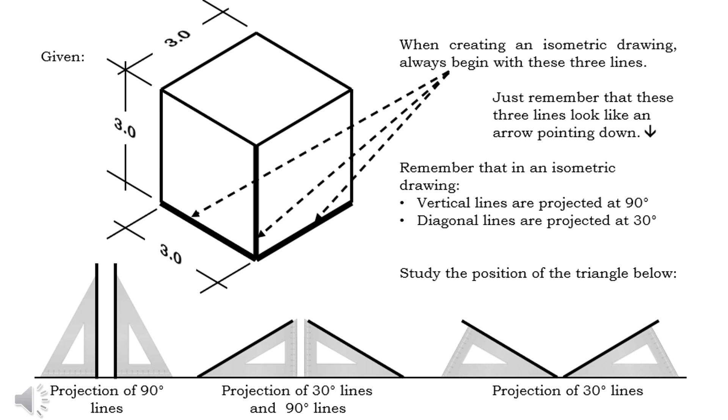For operation sheet 1.1, you are going to create an isometric drawing of a cube with a measurement of 3 centimeters. Make sure that your materials are already ready for use.

For step number 1, create the lines that were mentioned. Use a 30 by 60 degree triangle guided by a T-square. So how are we going to do that? Just follow the steps that I'm going to show you. We have here the T-square to guide you with creating the lines using a 30 by 60 degree triangle.

First, let us create the vertical line. Whenever you are going to create a vertical line or whenever you are using a triangle, just remember the position of the triangle. Always remember this, it's just like that.

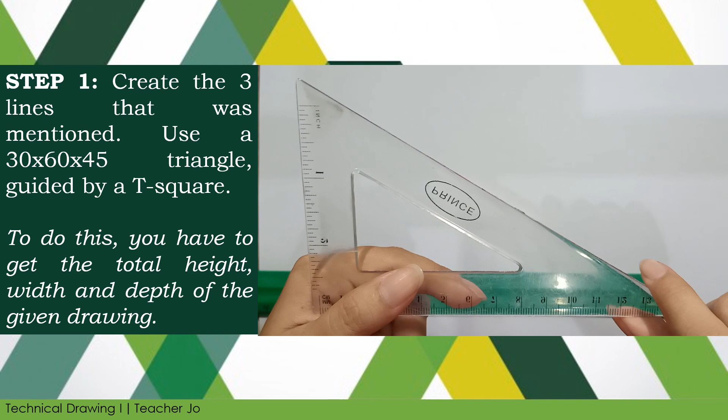We have to create the diagonal lines, and then you're going to flip it on the other side. So you will be projecting the vertical or diagonal lines on the right side from the intersections of these two lines that you have created earlier, from this projection to...

I think the lines are too thin. Can you still see it? Okay, so...

The next is, it is said here that to do this you have to get the total height, width, and depth of the given drawing. So these three lines actually represent the 3 dimensions.

The vertical line here would be the height. The diagonal line on the left will be the width, and the diagonal line on the right side would be the depth. Since we have a cube, or the given object is a cube having a measurement of 3 centimeters...

From these intersections you will measure 3, or you will mark a point with a distance of 3 centimeters. So you may use your ruler or your triangle, since it also has the centimeter measurements on this scale.

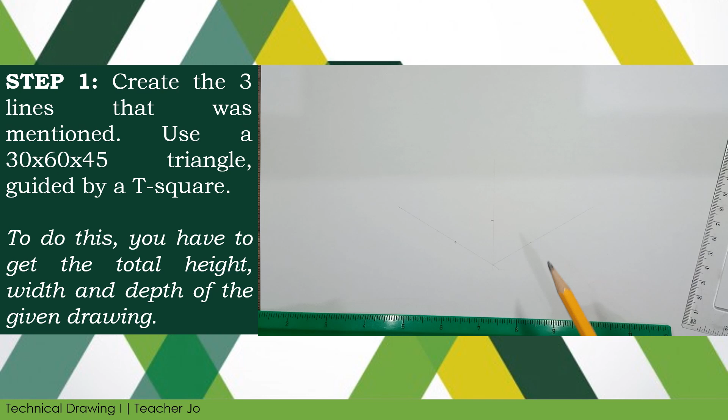For step number 2, project vertical lines from the ends of the created diagonal lines. We have 2 diagonal lines in this drawing that was previously created. The next step that we're going to do is to create a vertical line.

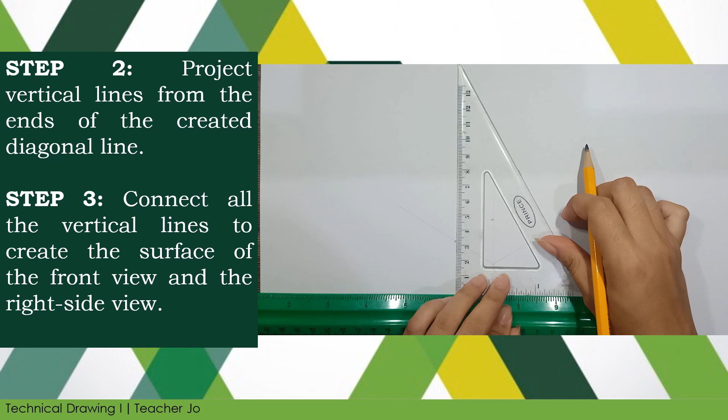Always remember that when creating a vertical line, we will be using 90 degrees, and then project. From this point that you created, just create a vertical line. Take a look at how I use this T-square to guide the triangle in creating lines. Now I have created a vertical line, and then on the other side.

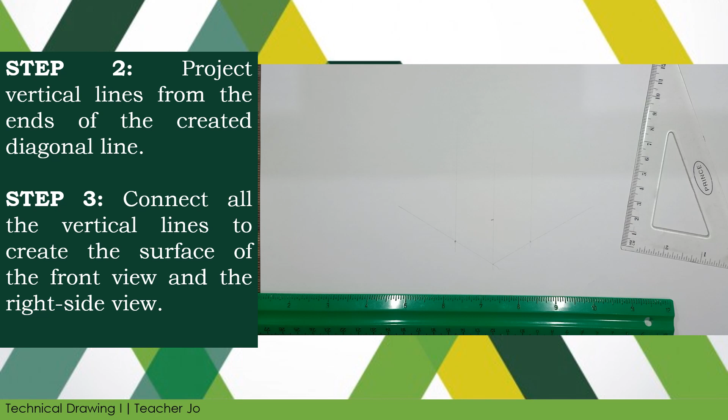Next, for step number 3, connect all vertical lines to create the surfaces of the front view and the right side view. Remember that I marked a point on this vertical axis. From this point, I am going to create a diagonal line going to the left and then to the right, which indicates the width and depth of the object.

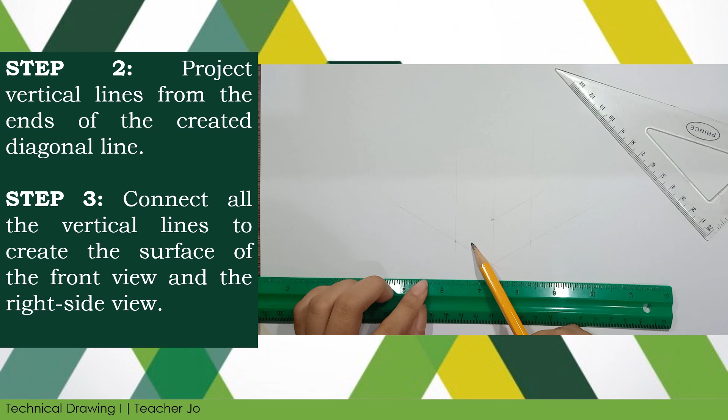Again, with the use of my T-square, I am going to guide my triangle to create these lines. From this point I will create a diagonal line, and then again from this point another diagonal line. So now I have the surface of the front view and the right side view.

Next step: create the surface of the top view by projecting and connecting the remaining lines. Which lines should I connect? These intersections will lead you to create the top view, or the surface of the top view. So I'm just going to use this triangle and project it.

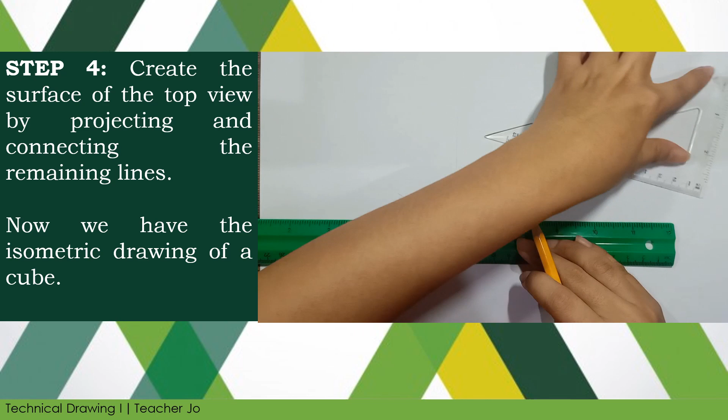And then I'm just going to flip or rotate this triangle and project the lines. So now I can visualize the shape of the cube here.

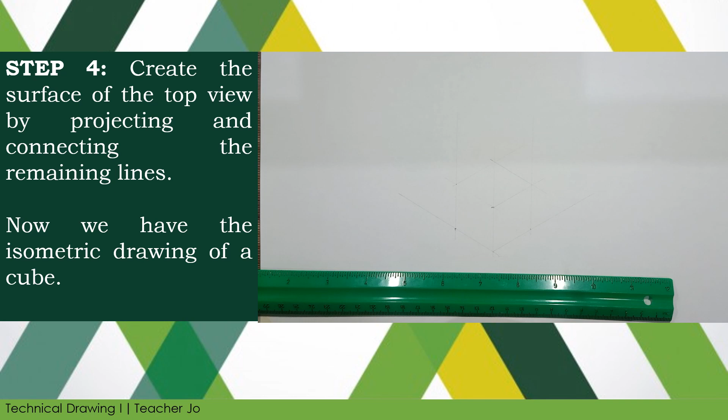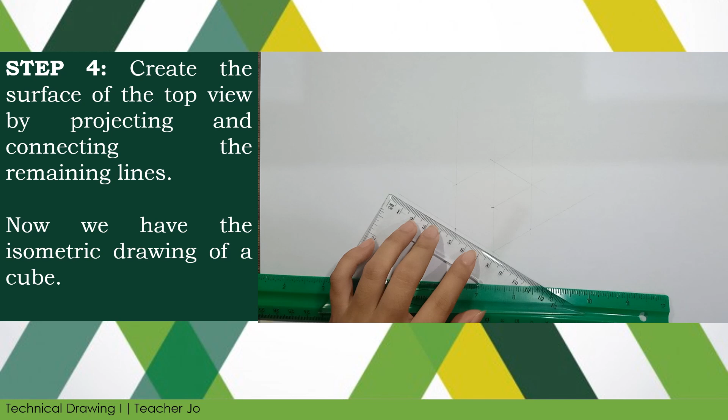So what is important to remember when projecting lines? Take a look at this - these lines are parallel with each other. Can you see it?

Let's get the outline of this object. First, let us darken all the vertical lines. With the use of our ruler, let's darken the vertical lines. Can you see? We have 1, 2, and then 3 vertical lines.

And then the next edges that we are going to darken are the edges on the front view. We have this diagonal line here, and then here. Now we have the front view.

Now let's create the right side view. Can you see that this line and this one are parallel with each other? They're facing the same direction. And then these lines are also parallel with each other, going to the same direction.

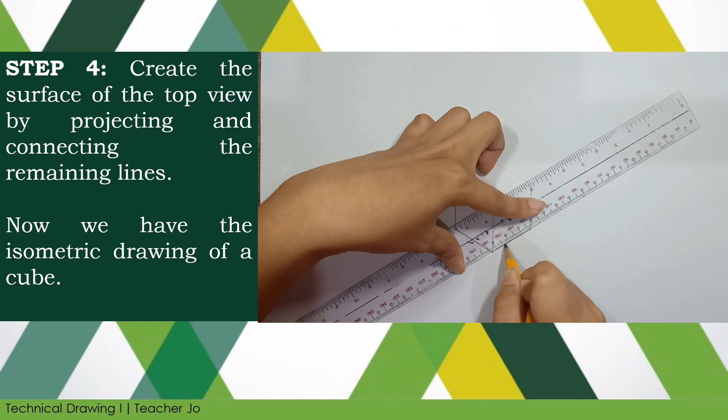So let's create the surface of the right side view. Let's darken this edge, and then this one. Now we have the right side view.

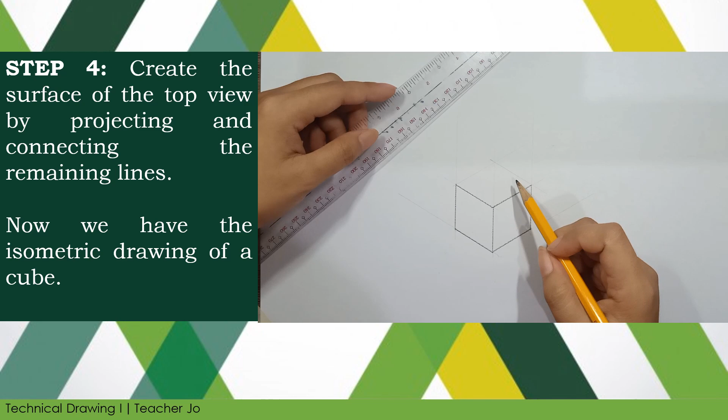The last surface that we have to create, outline or darken is the top view. So this line - can you now see it? These lines are parallel with each other. And then this line is also parallel with these two lines.

Take a look at this - these are all parallel with each other. So now we have an isometric cube.

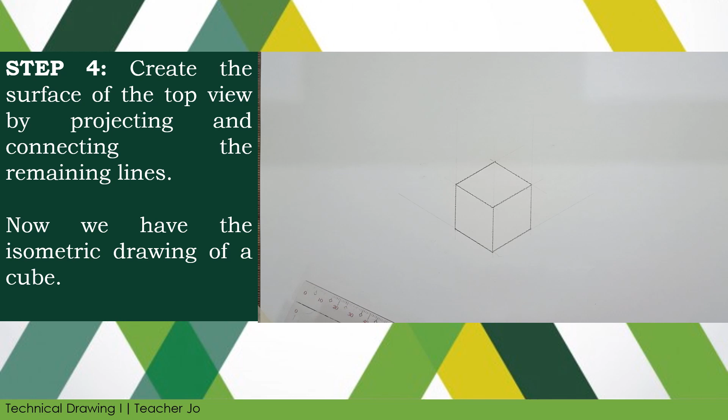For the next activity, operation sheet number 1.2: create the isometric drawing of an object based on a given orthographic view. In this activity, I will show you an orthographic drawing of the isometric or 3D object that we are going to create.

Now take a look at the given orthographic drawing here. We have the top view, front view, and right side view, where each view is indicated with dimensions.

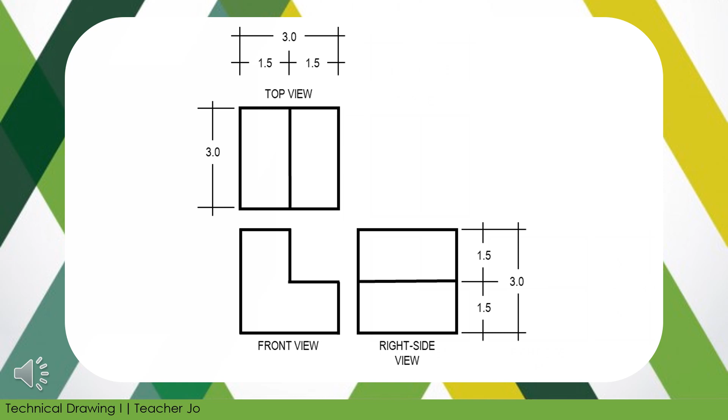For step number 1, you have to create the 3 lines that were mentioned earlier. Use a 30 by 60 degree triangle guided by a T-square. To do this, you have to get the total height, width, and depth of the given drawing.

In this orthographic drawing that is projected here, we have the dimensions indicated on each view. So we have to find the height, depth, and width of the object. The dimension encircled on the right side view would be the height, the dimension circled on the left side of the top view would be the depth, and the width would be 3 cm, which only means that the base form of the object we are going to create is a cube. It is only the base form, not the actual shape of the object.

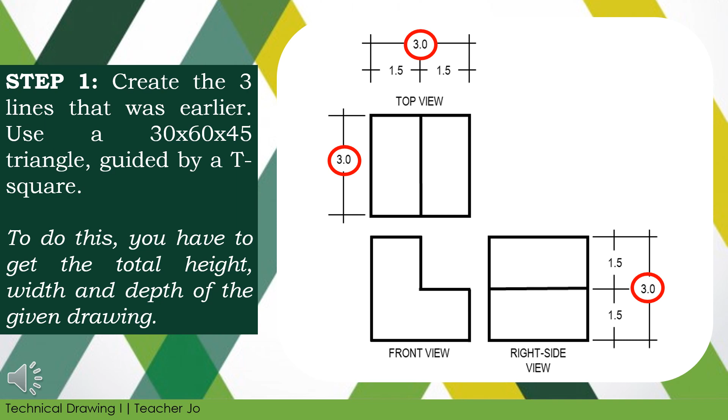Okay, so now let's try creating the base form of this given object. First, we have to create a vertical line. Just remember the steps and don't be confused.

And then we have to create the diagonal lines. It's just the same steps. Okay, so we have to intersect this - these 3 lines should be intersecting with each other.

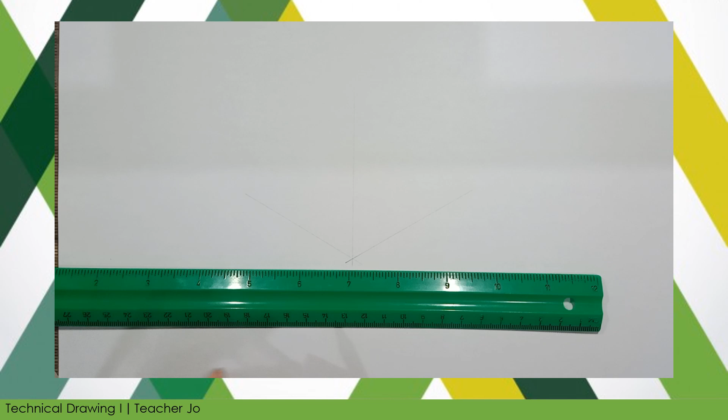From the instruction, we have to get the total height, depth, and width of the object. So we have 3, 3, 3, which means the base form of this object is a cube.

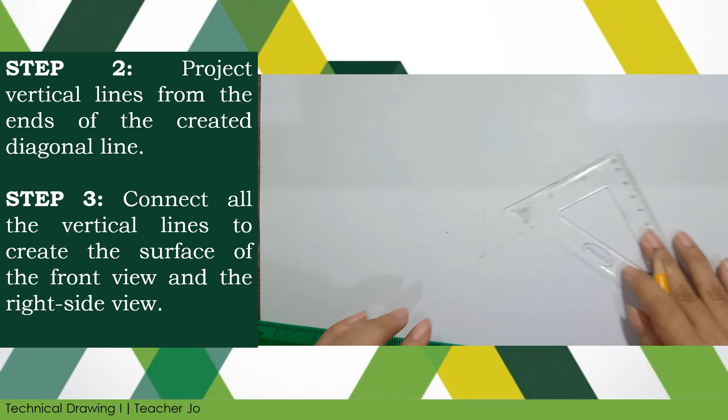So mark a distance of 3, 3, and then again 3 on this side. After that, we have to project a vertical line again - it's just the same steps.

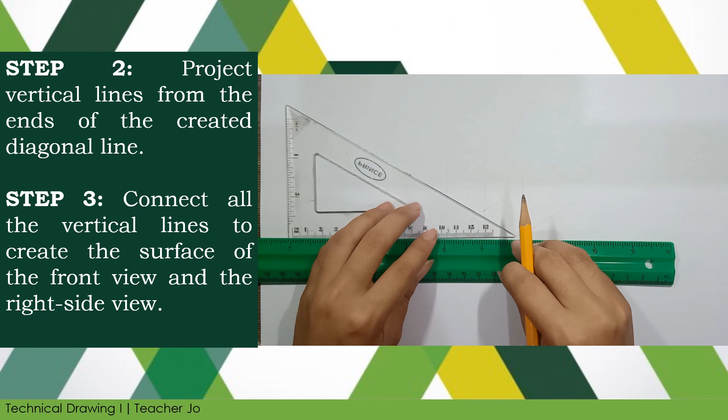So after projecting the vertical lines, we have to create the diagonal lines. From this point, and then flip the triangle to the other side. And then create the top view - from these intersections and these intersections, we will be creating diagonal lines.

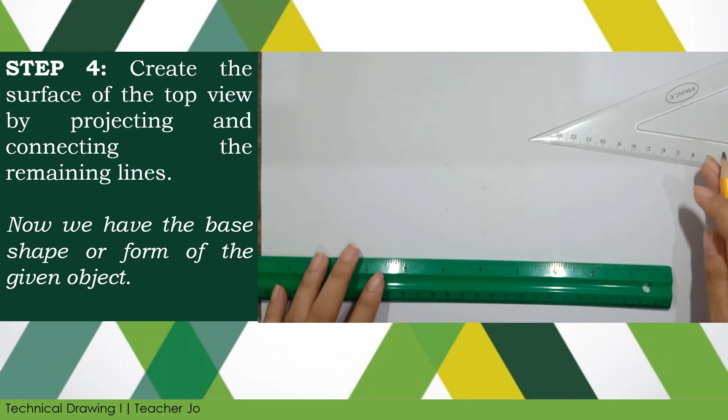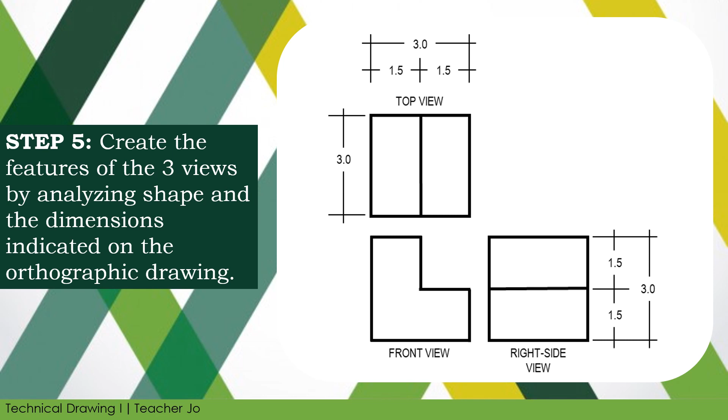Okay, so now we have created the base form or shape of the given object. So for the next step, we create the features of the three views by analyzing the shape and the dimensions indicated on the orthographic drawing.

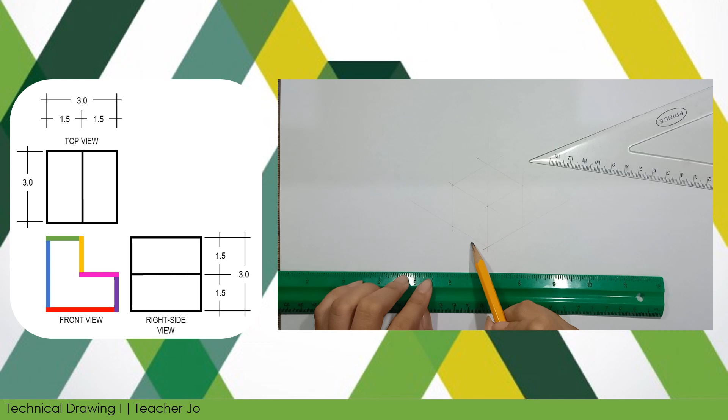Let us first create the front view. I have color-coded each edge or line in the front view because we are going to create it one by one. Let us first identify the red line on the drawing. So the red line would be this one. Since it is already made or created, we can now darken it or outline this one.

Okay, next we have to identify the blue line or blue edge. So we have to create this vertical line. Now we are done creating the red and the blue lines on the given orthographic drawing.

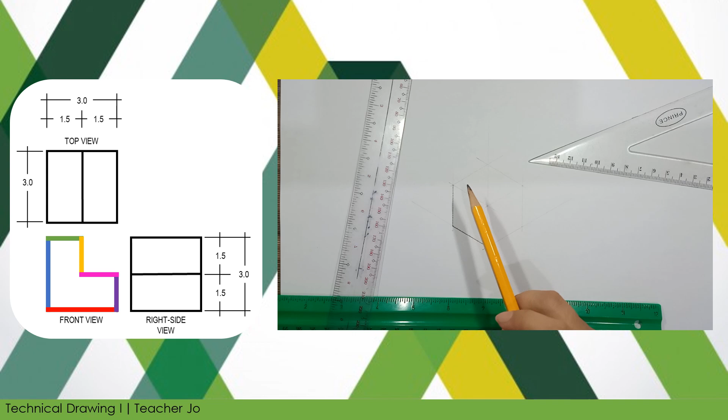The next one is we have to create the green line, which is above the blue line. So this line will be from here. Now let us find the dimension of the green line. How are we going to find it? It's just a matter of analyzing and observing.

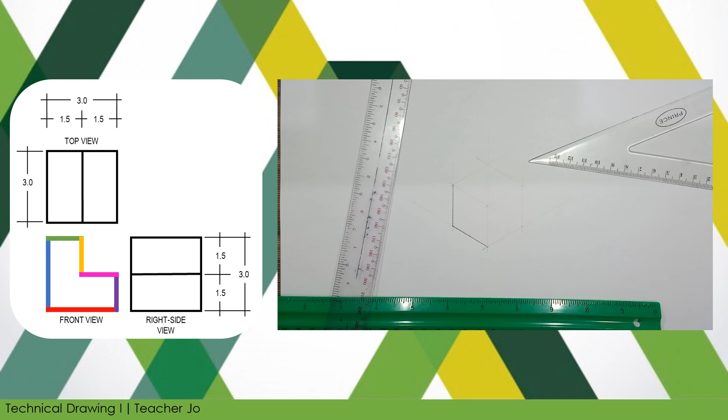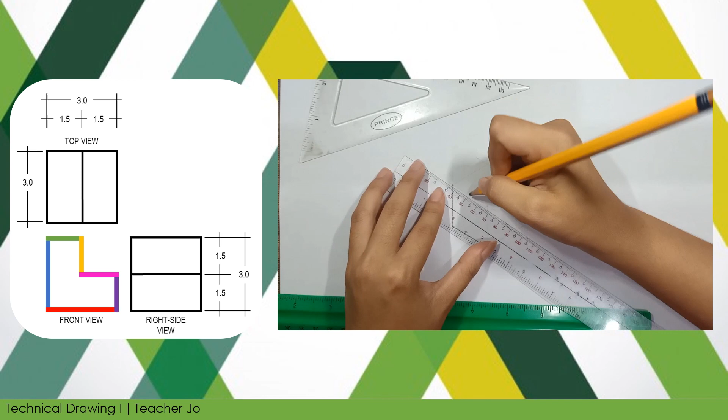If you observe, the green line is the same as the line on the top view, which measures 1.5 centimeters, meaning it's half of the total dimension or total width. So we have to measure 1.5. We already marked 1.5 here. Let's darken it since we are creating the edges one by one.

Okay, so the next is the yellow line. How are we going to create or find the dimension of the yellow line? Just look for the line that is parallel with the yellow line from the right side view. So which line is parallel with the yellow line on the front view?

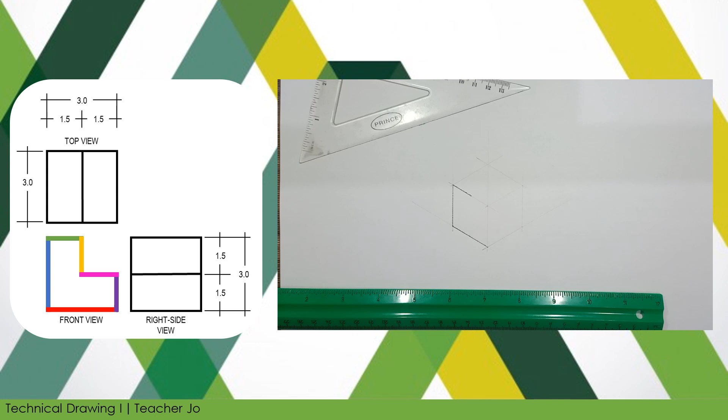So we have this line measuring 1.5 centimeters, meaning it is also half of the total height. So we have this height, this is the total height. We have to mark 1.5. Okay, so 1.5.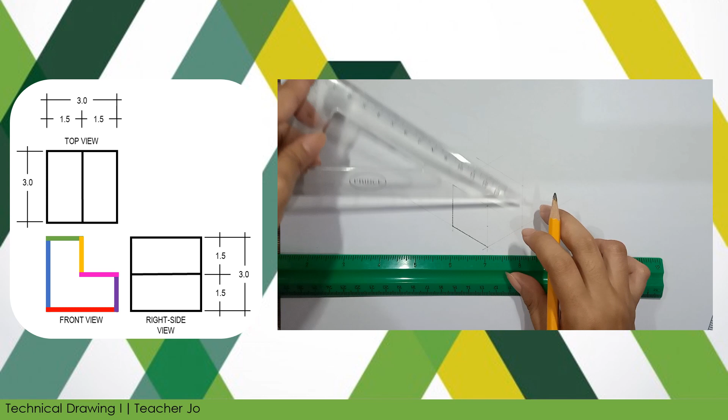So if we're done marking it 1.5, let us project a diagonal line. Can you see it? I have projected a diagonal line, and to get the yellow line on the front view, you just have to project it downward, 90 degrees, until it touches this line or intersects with this line.

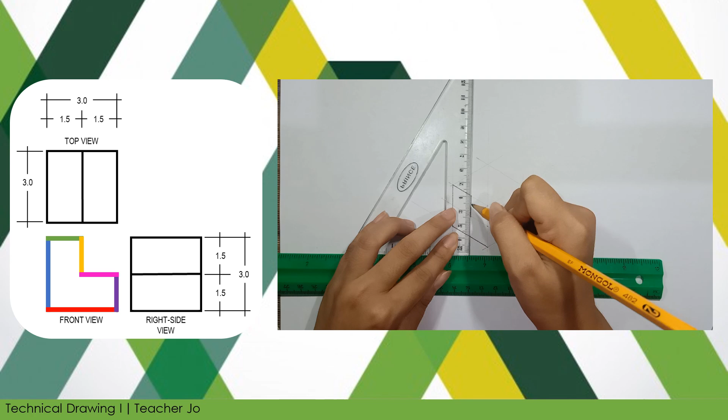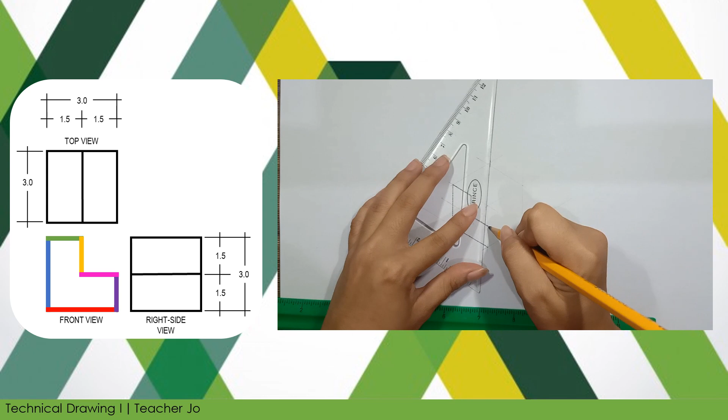Okay, so now we have the yellow line, and next we have the pink line or pink edge. So this will be the pink edge. Let's darken it. And then last is the violet line. So this will be the violet line. So this is how your front view will look like.

So to create the remaining views, you will just have to project the lines from the front view. How are you going to do that? Let us first do the top view.

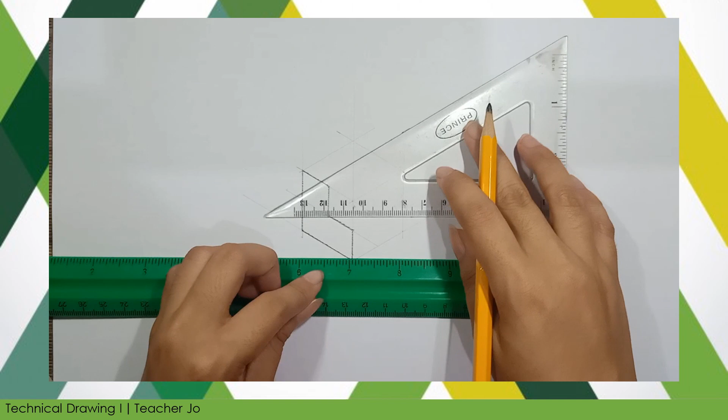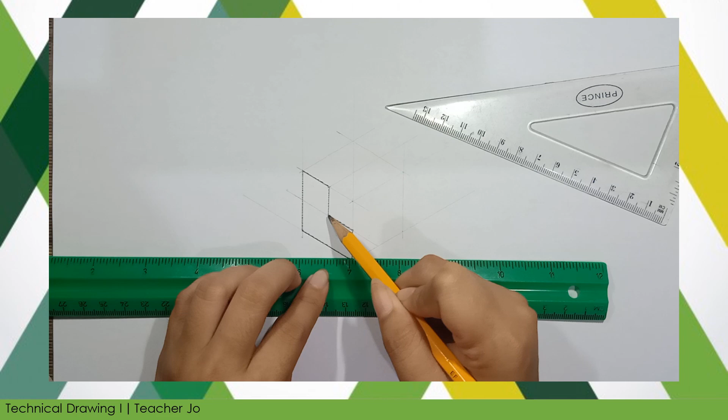Okay, so you can see here that the line is already projected from this point. And then now I'm going to project a line from this point. And then another point here, I'm still going to project it. And then from this point, I'm going to project a diagonal line.

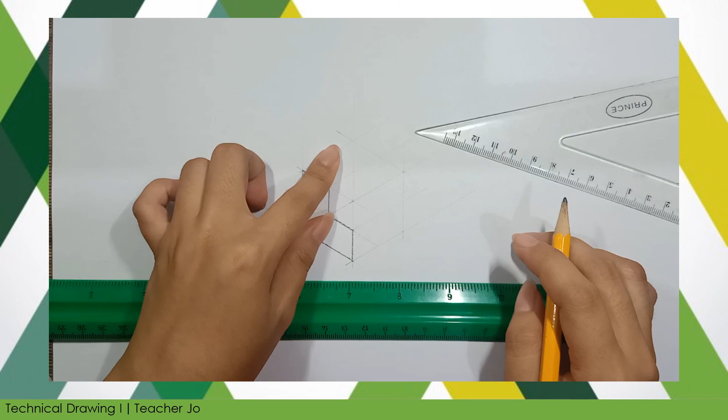You know, doing an isometric drawing is easy, just don't be confused. Okay, so now I have created the top view.

Okay, so and then let us create the right side view. So how are we going to create the right side view or the remaining edges? We can see here the intersections of the lines that I have projected. So this line or this intersection, I just have to project it downwards until it touches this line.

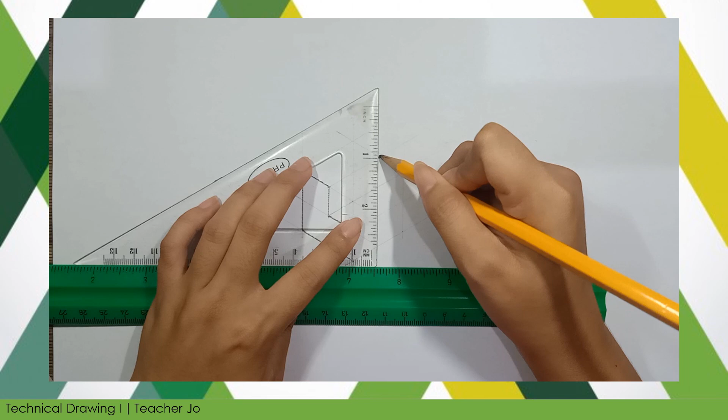Okay, project. Done. Now, after projecting this line, I have to connect these two lines or these two intersections using this 30 by 60 degree triangle. Okay, so now, can you see the shape of the three-dimensional object? Let's darken the edges to reveal the shape of the object.

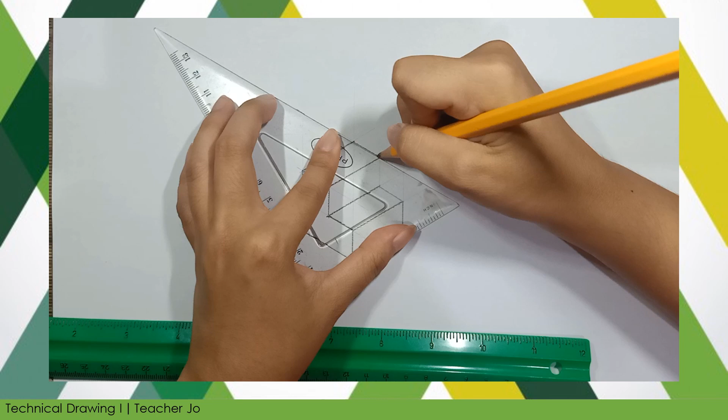As I have said earlier, these lines are parallel with each other. Every line, every edge is parallel with each other. So there, we have the shape of the given orthographic drawing. So this should be your output.

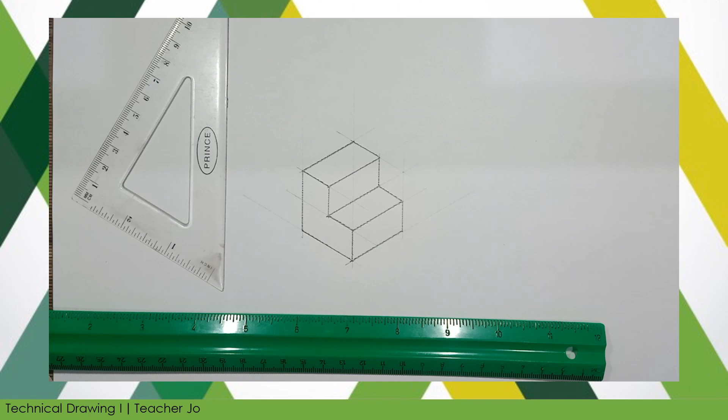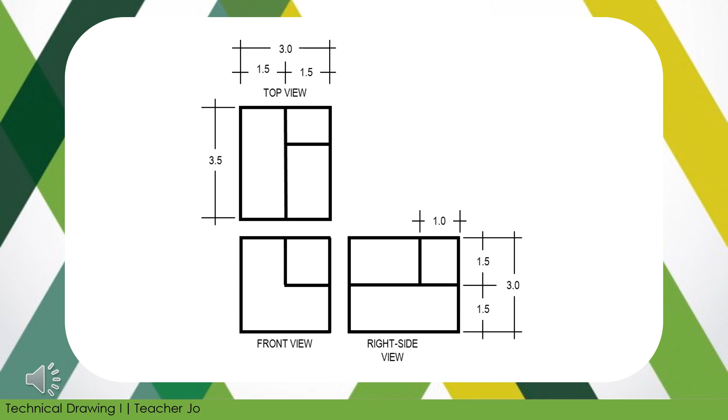Now, are you ready for an individual activity? Hopefully you have learned something from the guided activity we did earlier. So in this activity, you are going to create the isometric drawing of this given orthographic view.

Before I end this video lesson, I would like to give you some tips. When creating an isometric drawing, always begin with the three axes. Get the total height, width, and depth, create the base form or shape, and analyze the features such as shape, lines, and dimensions of the given object.